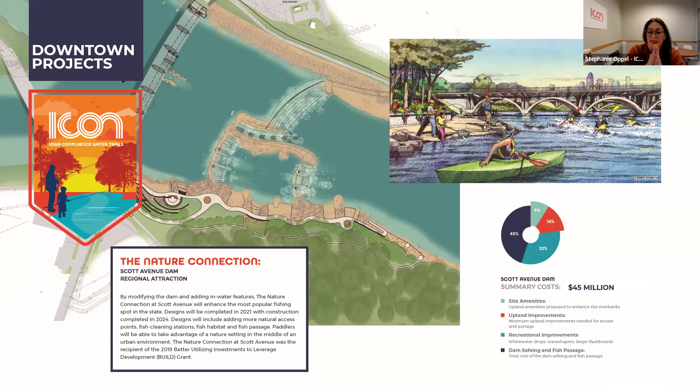Next slide. Okay, so Scott Avenue, this is the rendering that you'll see of Scott. If you remember, this project has a couple of whitewater features and a cascading drop in the middle. There's that great habitat channel. And then we are doing some modifications to the dam also to make it safe and also to make it passable for kayaks and canoes. If you want to advance to the next slide, this is a picture from a few weeks ago of some work happening out there. And to give us a more detailed update on the construction, I'm going to turn it over to Gabe Nelson with Snyder. I think he's on.

Thanks, Stephanie. So, can I share my screen? Host is disabled participant screen sharing. So anyway, I'm working on it, Gabe. Just give me one second. Okay, sounds good. So yeah, what you're looking at right there is the cascading drop in the middle of the river.

In a second here, I'll put up a plan sheet, you can kind of see the overall view of the site and what we're working on. The contractor is... here, I'll try to share here.

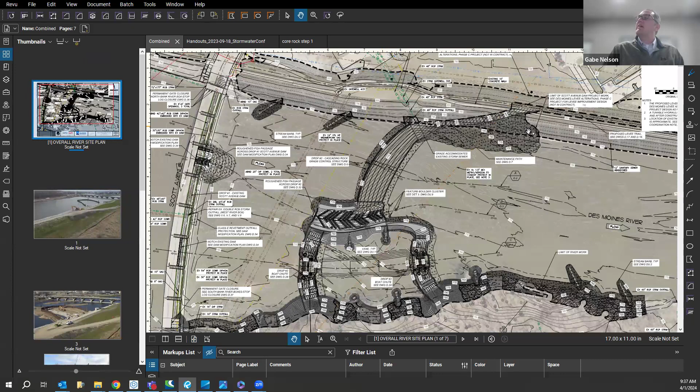So you saw the rendering of the site. What we're looking at here is the overall site. This is the north bank of the river, with a levee on both sides. Currently, the city of Des Moines has raised their levee on the north side of the river and completed that process. What you're looking at is a maintenance path down to a cascading drop. This is the habitat channel, a new fish passage in the middle of the river. This is where all the recreation happens, and we're stabilizing the entire south bank. Also, this is the Scott Avenue Dam, where we're doing some work as well.

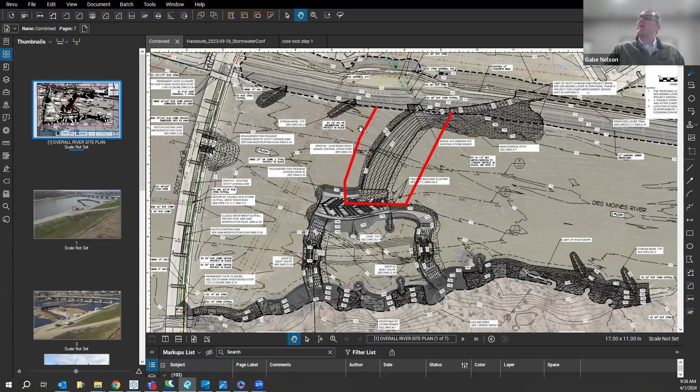At this time, the entire maintenance path embankment has been put in. We're working on the cascading drop, and we've done quite a bit to the dam. In a second, when you see some pictures, you'll see a big cofferdam in the middle of the river, about half the size of the river, to give you a little scale.

So this is what the site looks like as of today. The river came up late last week with all the rains early in the week, and they actually allowed the cofferdam to flood out. They didn't want the river to come up enough that it was coming over the cofferdam and damaging what we already had in. The river peaked about Friday, so they plan on pumping this down again. It hasn't been up for very long, so it shouldn't slow us down too much.

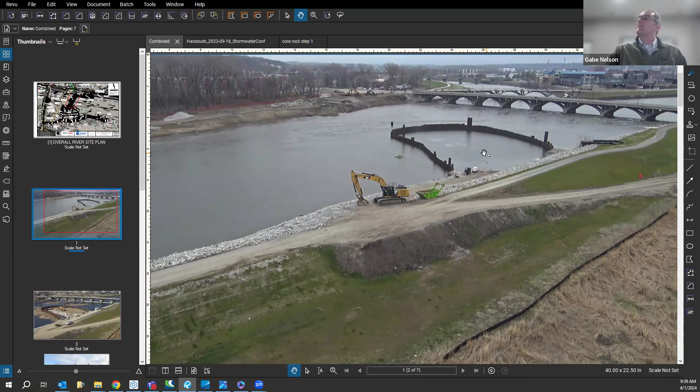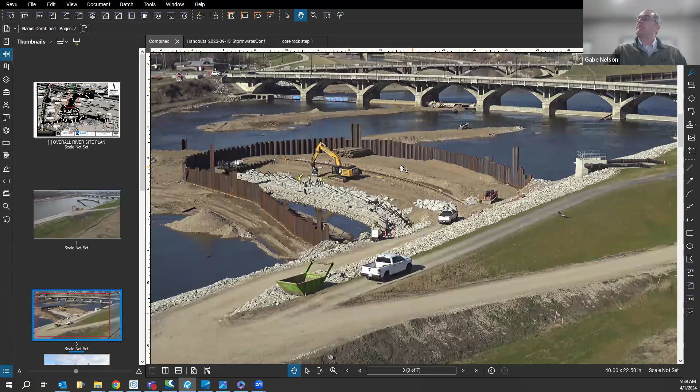But here is a better picture, this is actually from Monday, if you want to know how much things change around here. So what you're seeing, I sketched out that large cofferdam - that is half of the river. The contractor is working on this cascading drop. That's a series of rocks, fairly large, at least 18 inches in each direction, and they build a series of 7 steps so the water will cascade over top of it.

We also have, this is the entire dam. 6 of the 8 spans of the dam have had a step placed on them, and that prevents that rolling action that's very dangerous and kind of sucks you down as you go over the dam and drowns people. That step has been constructed on 6 of the 8 spans, so the step's actually completed. This 3rd span is actually the one that gets cut down.

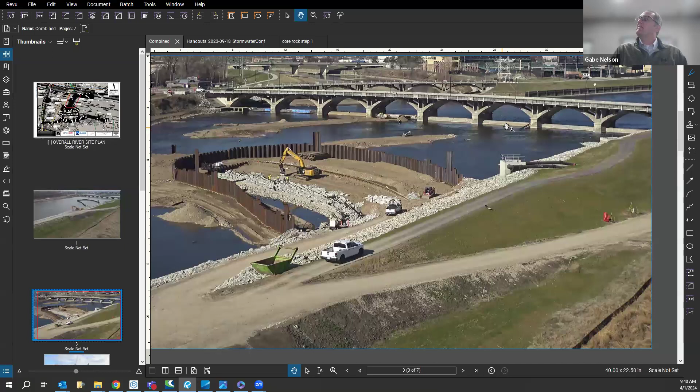We have not done that yet. That's the span you'll kayak through. And then this span gets cut down as well, and a new fish passage is added. You can kind of see the old fish passage that was constructed in the 1930s. We will fill that in, and actually the fish passage will be this entire span.

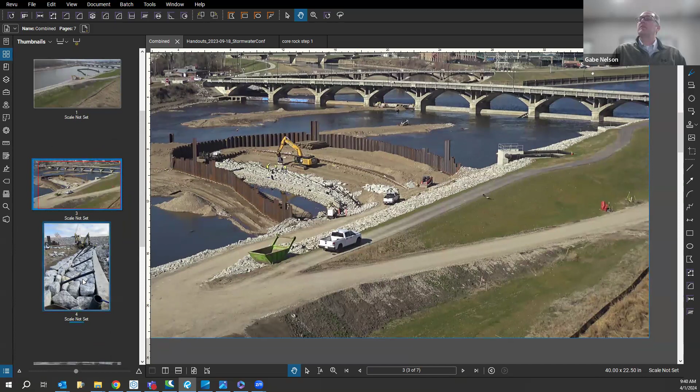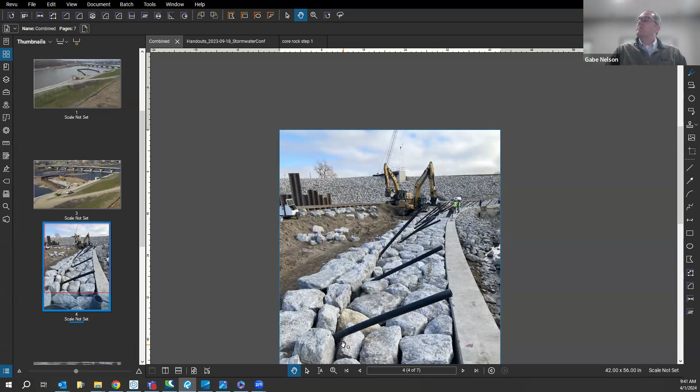Moving forward a little more, this is a better picture of one of the steps of the cascading drop. The first 2 steps are complete at this time - this picture is a little old. These are actually under-drains you see sticking out a little bit. They get trimmed off, so you won't actually see those, but that's a way to equalize the pressure under the steps.

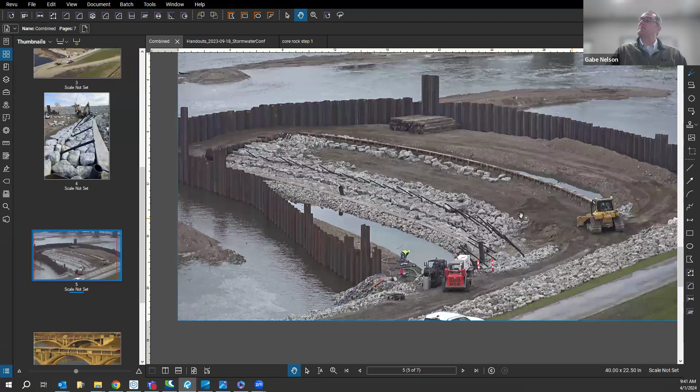This is as of last Monday, so the first 2 steps are basically completed. They actually grout these in place, so nothing can ever move once they get it in place. They're going to grout this as they go, but they're working on the 3rd step right now. They'll get all of this grouted, and then continue working their way up to the top.

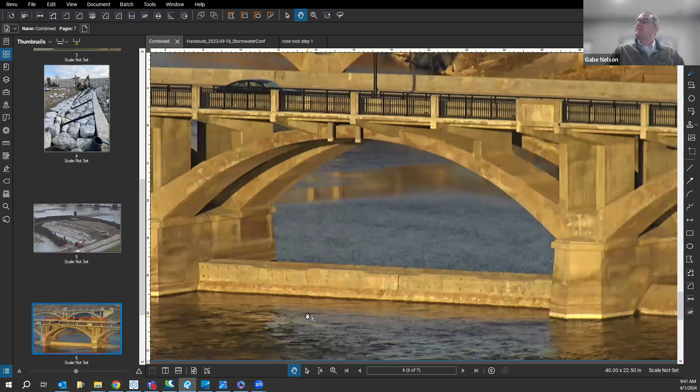Let's see here, I don't know how well you can see this online, but this is actually the completed step. This is what prevents that rolling action over the dam that kind of sucks you down. As of last week, since the water came up, one of the good things is we were actually able to test these out, and it does stop that hydraulic rolling action that is so dangerous with these dams. And this is just a shot of the southeast bank.

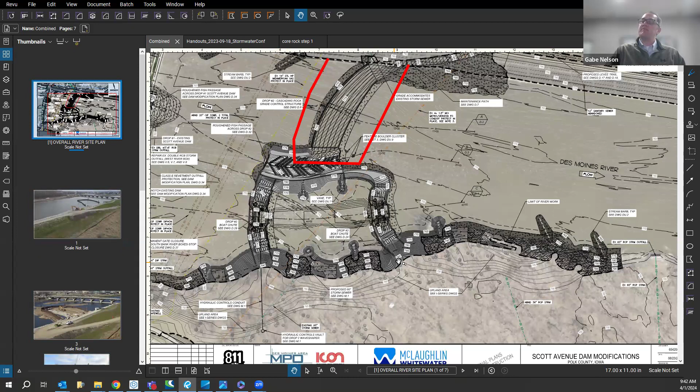When you look at this picture, you're in the area at the very southeast part of the project. As we move closer to the rec drops, we'll place a bunch of boulders and grout them in place. But what you're seeing here is that very southeast bank. What we do is place a bunch of riprap on the bank, and then vibrate river sand into the voids, so it becomes like a beach but rock hard, to help it stand up to higher flows. Hopefully most of the sand will stay there, but you'll still be able to walk down it into the river.

So that's all I really had for a construction update. The contractor is continuing to work.

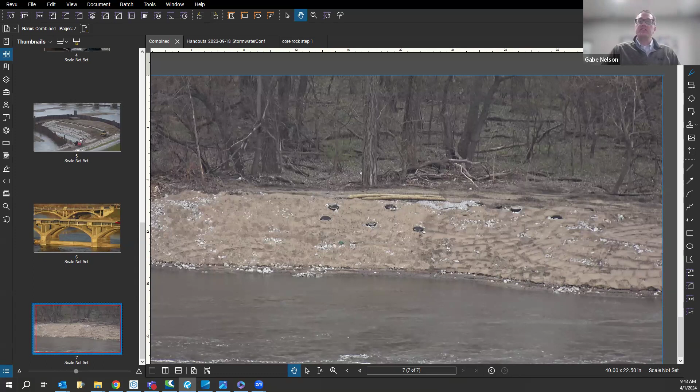It'll continue to work over this year, and actually the entire project in the river won't be done until next summer. And then we're actually letting an uplands project separately, which will do most of the improvements on the south bank. So most of that construction happens next year as well.

Any questions for me? Okay, thanks, Gabe. Thanks.

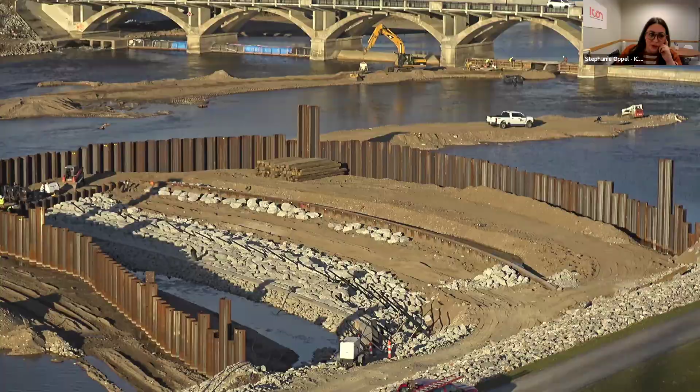In addition to our Scott site, we also have the Harriet site, which is downstream from that, not this image. That will start construction here very soon - April was their official start, so that will be underway soon. That project will be completed yet this year, but since it's the takeout for Scott, we won't really have as much of an impact there, but there are some great conservation practices happening down there as well.

What you're seeing right now is our Fleur Drive site. This is sort of a concept map. We are in the design process. We are going to hit 30% design and be able to look at those plans about two weeks from now.

So as you can imagine, where you're looking at kind of where this donut chart is, that's where the Coleman Bridge would be. On the south bank here, opposite that would be Gray's Lake. So this is kind of that wooded peninsula there at the curve right next to Fleur.

Upstream from this, there is a Des Moines Waterworks dam that is part of the infrastructure to support drinking water. So we are working very closely with the Des Moines Waterworks, as well as the city of Des Moines, and then Polk County Conservation, which will eventually take over the land ownership for this peninsula area, on the design of this. So more to come, but this one will soon have design completed and be into permitting.

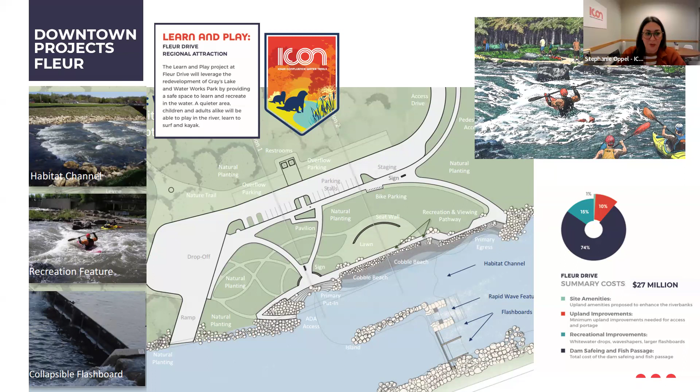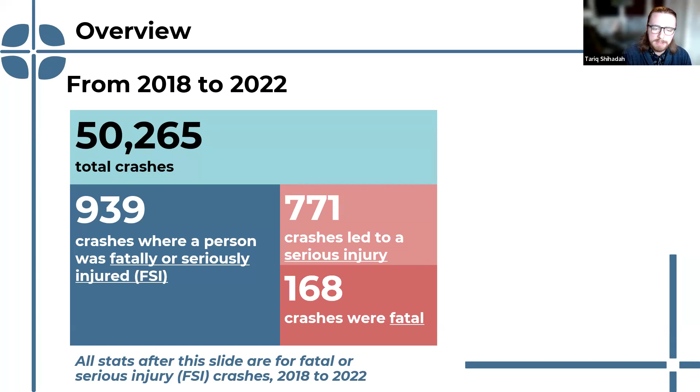Okay, so quick, a few high level numbers here. From 2018 through 2022, there were over 50,000 total crashes in the area. 939 of those involved a fatality or a serious injury, that's FSI, like we were talking about. Serious injury we generally qualify as an incapacitating injury, an injury that an individual will not necessarily fully recover from, at least in the short term. That involved 168 crashes that were indeed fatal.

So of those FSI crashes, 576 of them involved exclusively motorists. 215 of them did involve motorcycles. 119 involved pedestrians, and 29 involved bicyclists.

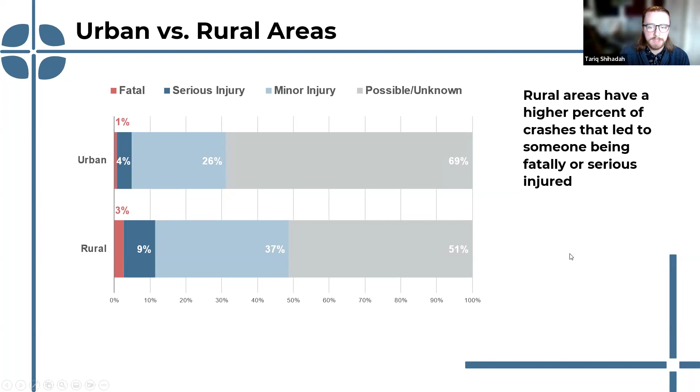Moving forward, again looking at the urban versus rural distinction, looking specifically at this orange sliver and the dark blue sliver on the left end of both sets of columns here. Noting that rural area crashes do tend to be higher severity. We're seeing higher speeds on these roads often, and in a lot of cases, as we'll see in a later figure, these tend to be single vehicle crashes involving a run off the road incident, which can be high severity and commonly involve a rollover or a collision with a fixed object, which can be very damaging.

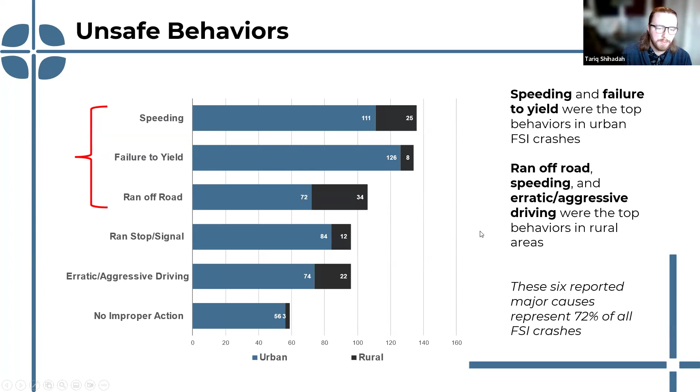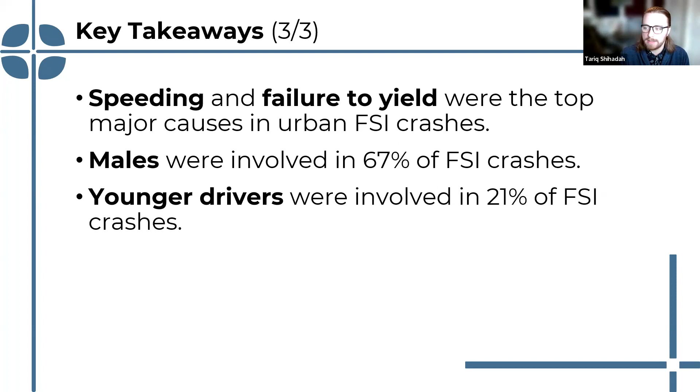Crashes involving motorcycles and pedestrians have a higher likelihood of resulting in a serious injury or fatality. About half of VRU crashes, those bike and ped crashes, occurred at an intersection, and of those, 65% involved entering or crossing a roadway at an intersection or mid-block location. Speeding and failure to yield were the two biggest behavioral components we saw, and demographically, males and younger drivers were notably overrepresented in the data — simplifying those down to a quick bullet point list.

This is what we call a systemic safety analysis or risk-based analysis, where we're understanding the roadway features as well as contextual features that correlate with higher probability of crashes, trying to get ahead of next crashes and identifying locations which may not have had a crash in recent years, but which might be expected to have crashes in the future.

I'll end with that and open up my team here to questions if there are any. There's a lot we've talked through here, feel free to digest it, and we'll also be available for questions after the meeting. Mitzi, I see you've unmuted, so I'll kick it to you.